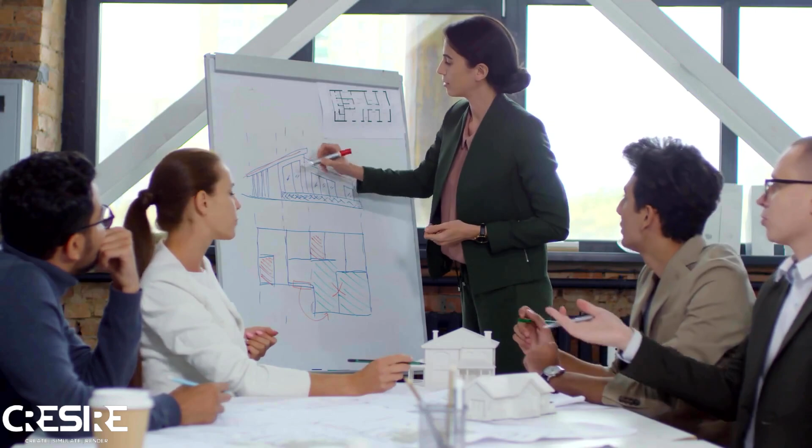Today we are diving into the basics of Building Information Modeling. You must have heard of BIM from your colleagues, co-workers, clients, or maybe from your university professors. Even if you have not, I am not surprised. Large architectural and engineering companies are actively adopting BIM because they have the budget and resources to implement the right training for their employees. However, there is much confusion and lack of knowledge of BIM in the construction industry, especially amongst fresh graduates and small and medium-sized companies.

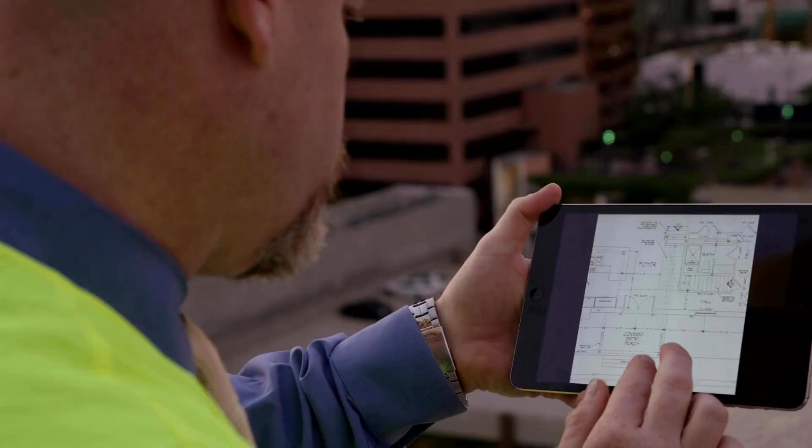If I take my example, I did civil engineering from the University of Sheffield. The university had good modules and courses, but they did not have BIM as a module. I graduated in 2016, but I had no clue what BIM was. I got first introduced to BIM during my master's studies in construction management, as it was an integrated module in my course. I got lucky at the university. So if you are studying construction management or BIM courses, there is a possibility that you get to know more about BIM and how to implement Building Information Modeling on construction projects. Well, I'm not the best guy to help you pick your courses or universities, so let's just get back to the topic.

BIM is so new for many construction professionals. For muggles, it's like an X-Men kind of thing with lasers and simulations, AR, VR, etc. So till now, I'm not able to explain to my colleagues and my friends and family what I do for a living. They usually go like this: he is doing something which has to do with 3D modeling and construction software. Well, there is construction software, but it's not that complicated.

So now let's dive into the main part of the video, which is what on earth is BIM. Ladies and gentlemen, boys and girls, BIM stands for Building Information Modeling, not Building Intelligent Modeling, not Building Information Management, and definitely not Building Intelligent Mission. There are some serious wrong full forms of BIM all over the internet. And BIM is not just 3D modeling. Neither is it a software.

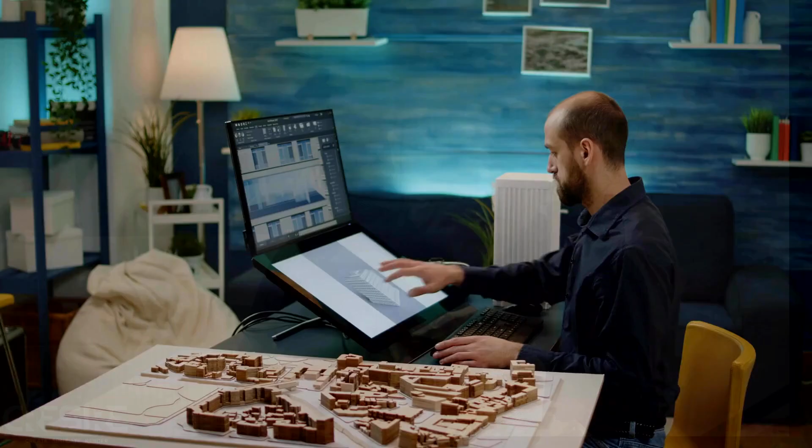A decent definition of BIM could be: it is a construction management tool that streamlines construction management activities to control construction cost and time overruns. That's it, simple. You can use BIM as a process to achieve your project goals, which for our construction projects are number 1, finishing the project within the estimated time, and number 2, within the estimated budget.

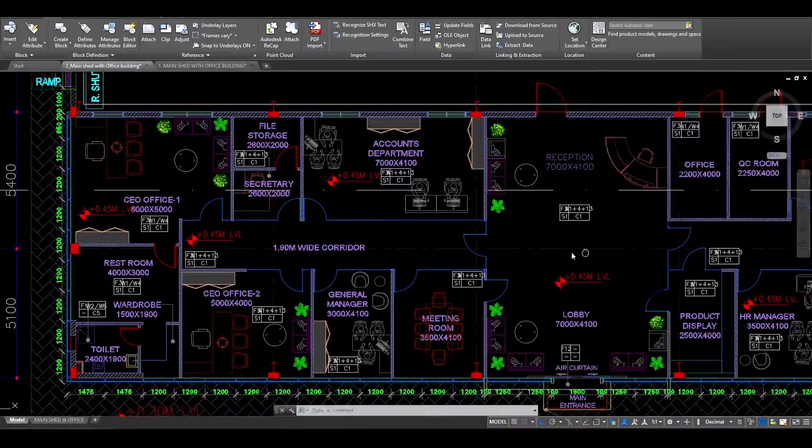But how does BIM do it? Well, it does it by integrating critical project information of a building asset into a 3D model. The critical project information typically includes number 1, design information, number 2, construction timeline, number 3, cost information, and number 4, asset and life cycle details. Now that we have learned that BIM is neither a software nor just 3D modeling, it is a process or one of the construction management tools for controlling construction cost and time overruns.

Great, now let's quickly understand the dimensions of BIM. Please note we'll just learn some basics here, and we'll dive into the dimensions of each of the 3D, 4D, 5D, and 6D parts in the later part of the video.

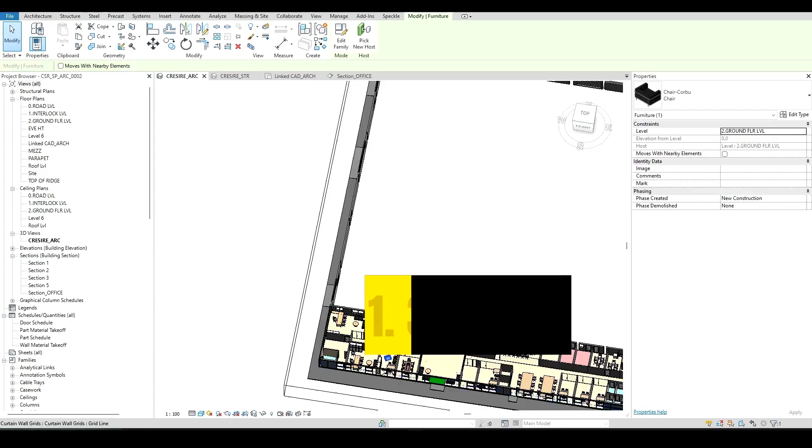Number 1, 3D BIM. Basically, this is using 3D design information to develop a 3D model. This is generally known as 3D BIM. So yes, there is a 3D model in BIM, but that's not all. We'll discuss more about 3D BIM in the next section. For now, just understand that 3D BIM is the development of 3D architectural, structural, mechanical, electrical, and plumbing models using a 3D modeling software such as Revit, where we use the 2D design information developed by the architects and the engineers.

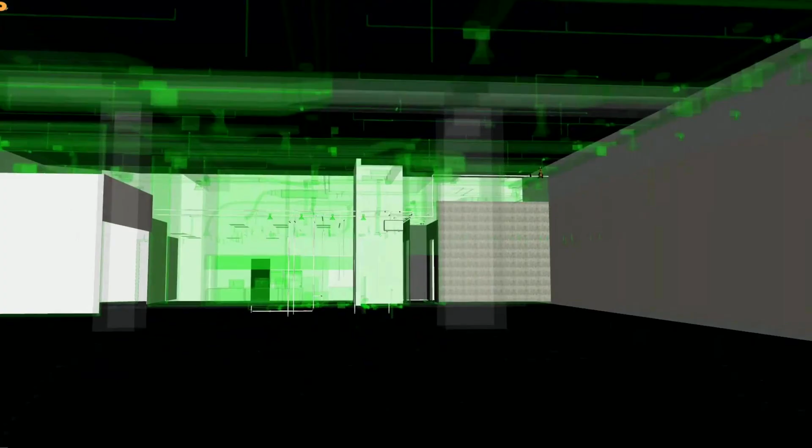Number 2, 4D BIM. This is the 4th dimension of time added to the 3D model. This typically includes a construction timeline. Now you'll think that we are time traveling doing the 4th dimension of time, but it simply means integrating the details of your Gantt chart or construction timeline to the 3D model using a software, generally Navisworks.

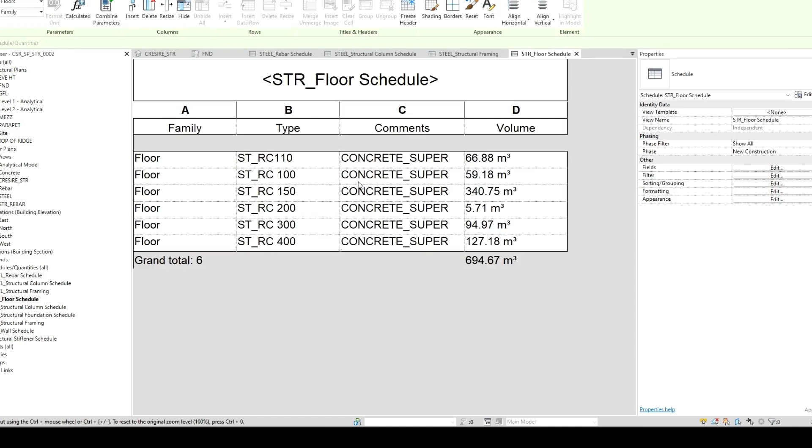Number 3, adding the 5th dimension of cost to the 3D model is called 5D cost estimation. Here you are integrating the cost information as per your location and the rates you are using. You can integrate the material information into your models and then do the further activities for developing the bill of quantities. We'll do all of that in the next section.

Number 4, adding the 6th dimension of life cycle details to the 3D model is called 6D facilities management, which is a highly effective tool for facilities managers. Well, that's it. It is as simple as it sounds, but it does include advanced software and 3D models. Maybe the muggles are right.

Now, let's dive into how storing design information, cost information, asset and building lifecycle details, and construction timelines in the BIM process help in controlling costs and time overruns.

Number one, storing design information. The idea of BIM is that the BIM team works parallelly with the design team.

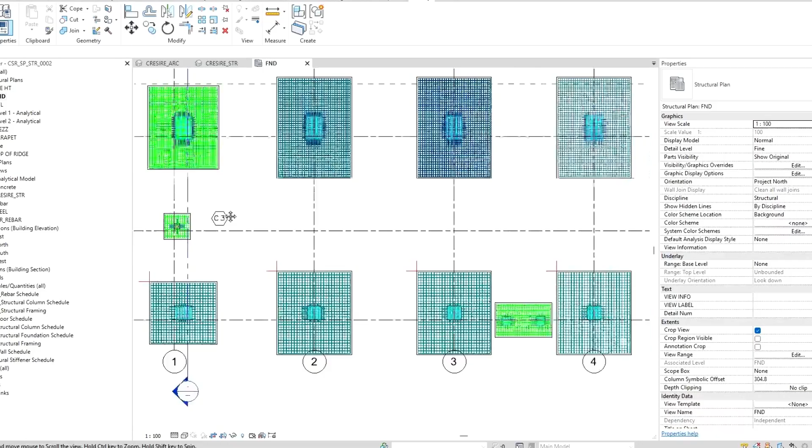This includes the development of 3D BIM models right from the conceptual stage, going till the detailed design stage. The construction manager usually appoints a BIM team which consists of 3 disciplines: architectural, structural, and MEP. Each of these teams will initially develop a 3D model using the 2D CAD or hand-drawn sketches, using the common software known as Revit.

These BIM models contain design elements of each discipline in a 3-dimensional workspace. The design details typically include walls, doors, windows, foundation, columns, beams, rebar, pipes, HVAC switches, etc.

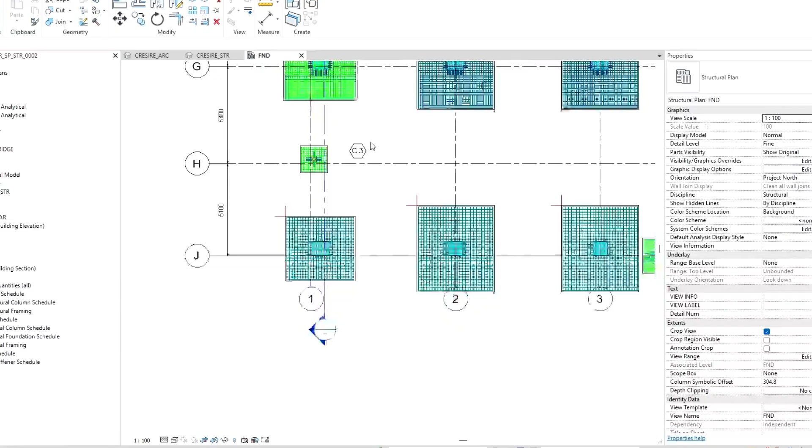BIM starts from developing a 3D model using the 2D design data. We initially develop 3 individual models of each discipline, consisting of generic elements which we usually implement in construction. As the design stage moves forward, these elements are populated with design information such as sections of columns, slabs, beams, reinforcement details, precise dimensions of walls, doors design, windows elements, roofs, etc.

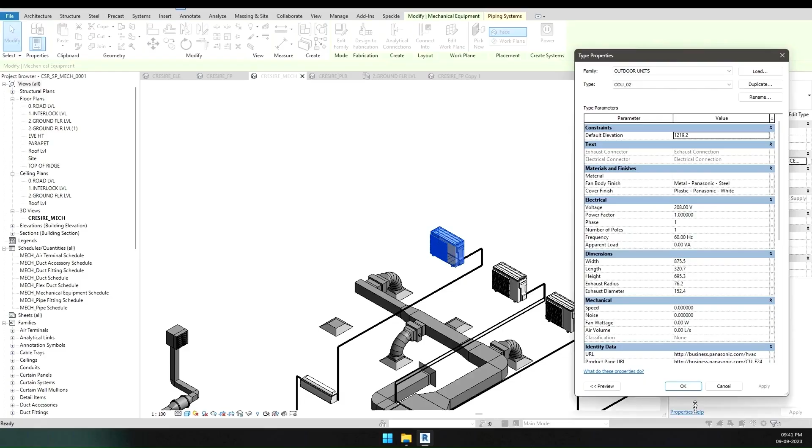So when you click on any design element, such as a primary beam in the structural 3D model, it shows geometrical details such as dimensions, sections, and the kind of reinforcement used in that particular column. You can further add more details such as contractor details, volume, etc., which we'll discuss in lifecycle management. Now we have 3D Revit models, commonly known as BIM models, from architectural, structural, and MEP disciplines.

The next step is superimposing these models together to form a single model. After design development is finished, we make one central model consisting of architectural, structural, and MEP models superimposed on each other. However, there's a lot of chance that these models could be prone to clashes.

This brings us to clash detection. What is clash detection? If you ask how can you ensure that these Revit models are developed precisely in terms of accuracy as per the 2D drawings, the answer is clash detection.

Clash detection allows you to check the behavior of these design elements from one another, from one discipline to another. For example, you can check if the wall on floor number 1 is clashing with the pipe on floor 1, or vice versa. The software commonly used for clash detection is Navisworks.

In this, we first import all 3 Revit models in NWC format, set the tolerance rates, and start assessing the clashes. Using the defined parameters, the software tells us the exact location of clashes occurring at different floors or locations. You can generate a report of these clashes and share them with architects and engineers to demonstrate the clashes occurring in the built asset.

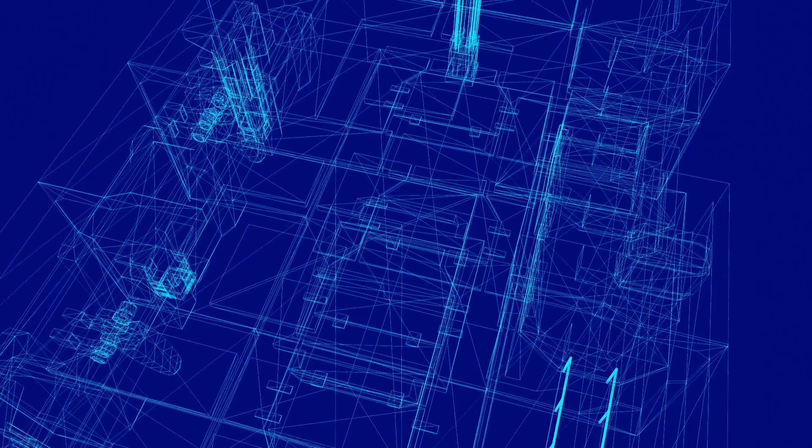Using this report, architects and engineers can further work on the design and rectify these clashes, which are further captured by the BIM team in their Revit models. When the Revit models become clash-free, we move to the next step in the BIM process, which is 4D scheduling and simulation.

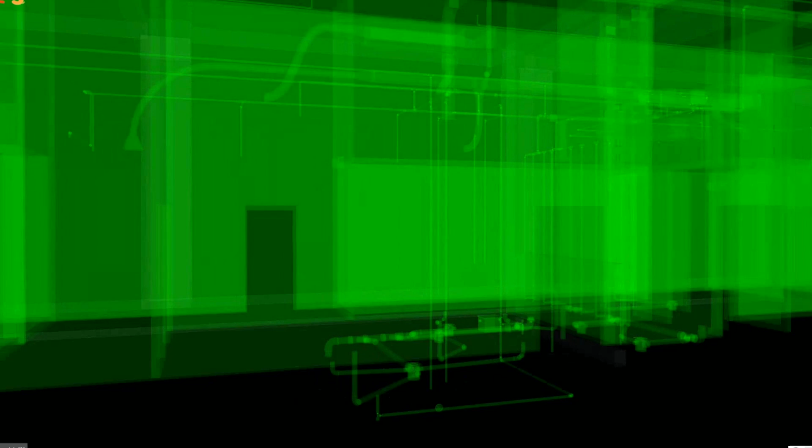As a construction manager, you are working with project timelines and Gantt charts. In this step, we simply import the 3D Revit model into a software such as Navisworks and assign dates to the activities as per the project timeline or Gantt chart.

For instance, the project timeline is for 2 years. We step by step assign the dates right from excavation till the completion stage. Once we're done assigning the dates, you can play the simulation and see the construction activities happening in a virtual 4D environment. 4D scheduling serves as a powerful tool for assessing and eliminating potential risks on site during construction and prioritizing tasks.

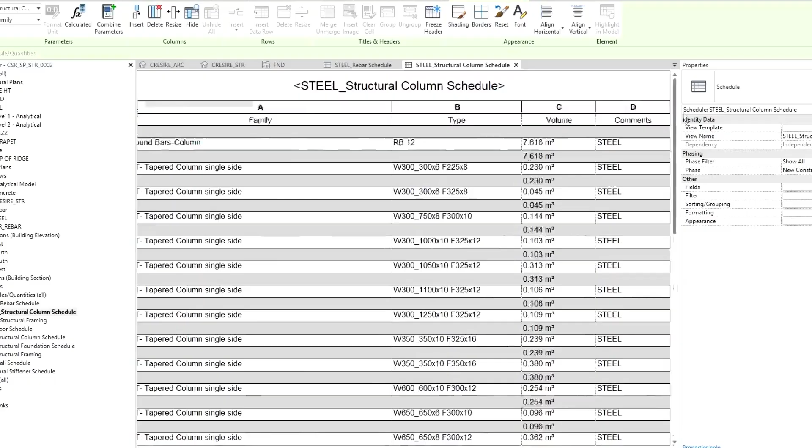Number 4, quantity takeoffs and cost estimation. The design elements in the Revit models we've developed in the architectural, structural, and MEP disciplines are populated with cost information. This includes the standard rates of materials as per your geographical location. So you define these rates to define design elements.

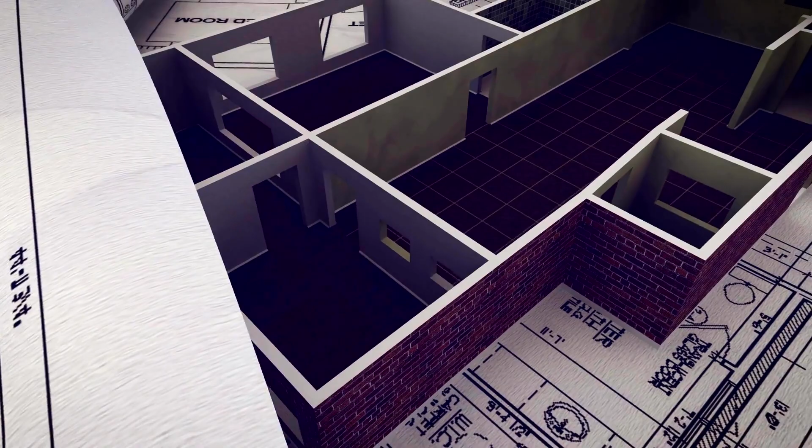Revit software offers a feature called quantity takeoff, which allows users to extract the precise number of quantities in a sheet format. For example, you can extract the precise number of columns, beams, doors, windows, slabs, etc. Using the rates you've defined, Revit automatically develops a bill of quantity that you can use for forecasting costs, making cost assessment much easier for quantity surveyors. This feature is quite awesome.

Now that you've prioritized your construction activities and shortlisted the final design, the next step is the final step, which is the 6D facilities management. 6D, as the name suggests, is where we add the sixth dimension of lifecycle details to the design elements. This includes integrating manufacturer contractor details, item IDs, item installation dates, maintenance schedules, configurations, service, and warranty dates, etc.

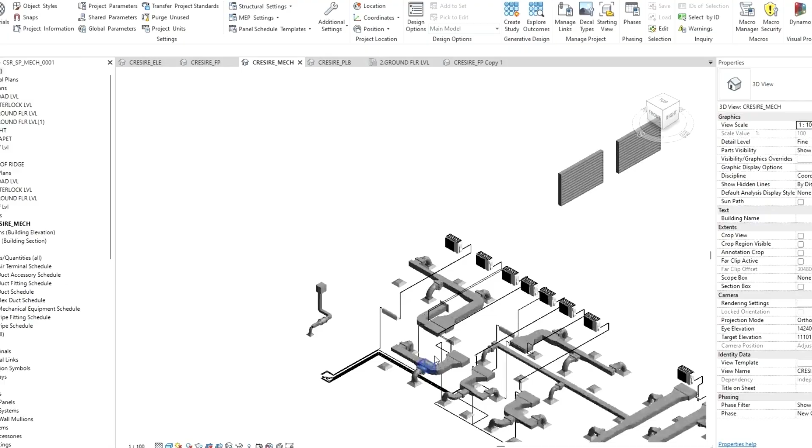The reason why 6D BIM is a powerful tool is because we have all the possible details of elements installed in a building in one single model. Using 6D BIM models, facilities managers can easily plan their maintenance activities, and building owners can smartly plan their future renovations.

So now you see the relevance of BIM in the construction industry. It not only gives you the 3D representation of your built asset, but provides a detailed, comprehensive overview of the elements installed in the building: how to use those elements, how to effectively manage them, how to assess their cost for better forecasts, and how to manage facilities better for potential future renovations, as well as basic lifecycle management.